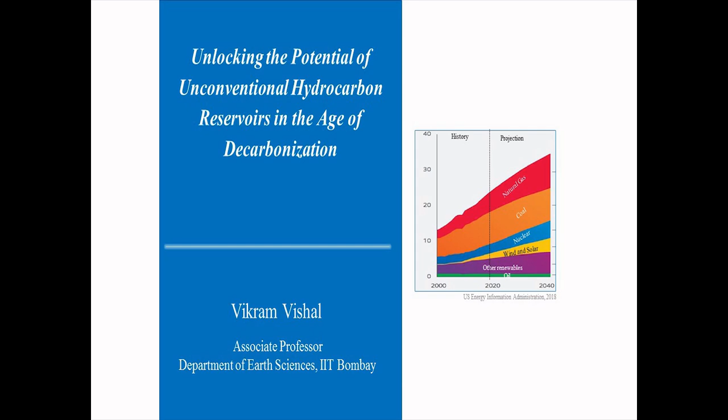So I take you from the enzymes that are presently active, as Professor Punekar introduced us to some of these enzymes that were active millions and billions of years ago, when these plants and animal life were supported, and they ended up becoming fossils and fossil fuels, what we are presently using for all our requirements of energy. So these fossil fuels include natural gas, coal, and oil. So the very first slide that I put here is to make a point that with the projection that we have right now and what we are currently using, the fossil fuels are here to stay, essentially oil, natural gas, and coal.

So do you know, when the sustainable development concept was introduced in the 80s, what was the percentage of fossil fuels in the energy mix? Any idea? It was 81% back then. So our target was to reduce fossil fuels in the energy mix and have a more sustainable development which is friendly with the environment. Do you know what is the percentage of fossil fuels in the energy mix right now in the world? It's still 81%. So we are still using the fossil fuels. There have been debates on how we'll transition from this to the renewables. That's the aim actually. We want to move on from the fossil fuels and target more on the renewables. But my point is that fossil fuels are here to stay essentially.

So what happens when we are burning these fossil fuels? Essentially coal, because India is predominantly, our energy is supported by coal, oil, and natural gas. So we are releasing large quantities of carbon dioxide. This anthropogenic carbon dioxide is being added into the atmosphere that we are living in right now. So from the historic ice records that we see from right now to 160 thousands of years before present.

So you see, whenever there has been a CO2 concentration rise in the atmosphere, it has been followed by a temperature rise. So there are many evidences which support that CO2, as you all know, is a greenhouse gas and supports the global warming that is affecting our planet as a whole.

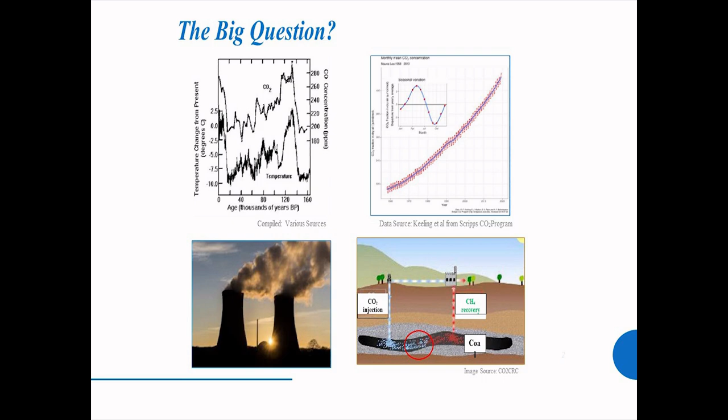So my research involves this condition where the reservoir is interacting with carbon dioxide. This fluid interaction with the substrate is what I work on, and I'd like to talk to you about that, but also mention something about the unconventionals. So this is a resource pyramid which lists the conventional and unconventional sources. Conventional reservoirs are the ones we have been tapping oil and gas from for almost 1.5 centuries or so, and they are pretty well understood around the world. So this is the top of the pyramid here.

But as we go down the pyramid, we have unconventional hydrocarbon sources such as shale gas, coal-bed methane, and gas hydrates. The incentive here is that the volume of oil and gas present in these unconventionals is very high. So that can actually support our energy requirements for the future, and our energy security is enhanced if we tap more of this. However, the challenges are many.

You see, this is the unit of permeability, 100 millidarcy. Permeability is nothing but the ability of the substrate to pass fluid through it. Once the fluid is passing conveniently, we can recover more and more oil and gas. But here the permeability is extremely low. So the target is to enhance the permeability of these reservoirs and get the oil and gas. But at the same time, we don't want to disturb the overall system, so system integrity becomes important.

So this is an example from US natural gas. We all know about the shale gas revolution of the US. After natural gas increased in the energy mix, as natural gas production increased, the overall CO2 emissions came down. So moving from coal to natural gas is actually helping us with less CO2 emissions. So that's an incentive, another way of looking at it.

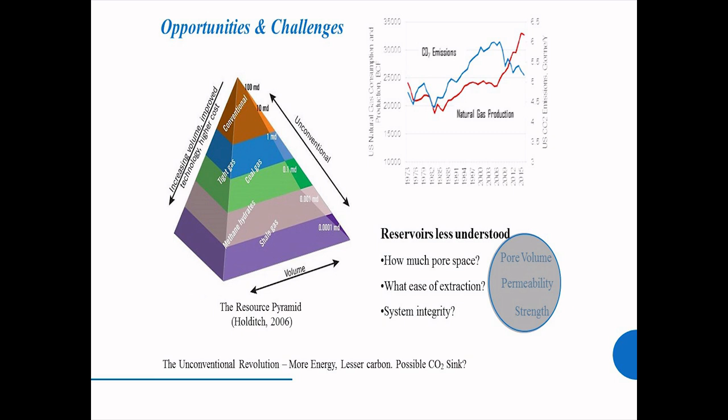So this unconventional revolution, as we call it, has more energy, this has less carbon, and then there is a proposition that once we have removed the natural gas from these systems, we can use the same pore spaces which have become voids to inject the carbon dioxide and store the carbon dioxide.

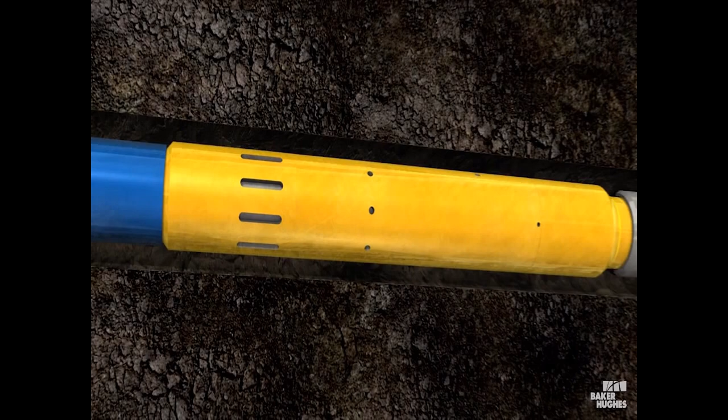Okay, so this is a small animation because we all know about hydraulic fracturing. This is by the courtesy of Baker Hughes. I just wanted to show how we actually hydraulic fracture. So the last 2 decades there has been development of this hydraulic fracturing and horizontal drilling. And see, this is the horizontal drill well. This is the target zone where we want to extract the gas from. But these formations are extremely tight, so the gas doesn't flow. So we need to create fractures so that these pores get connected.

So this high pressure proppant and fluid that is flowing through this tube, it's called a ball and sleeve mechanism. This blocks the other part, and this high pressure leads to fracture. And in these balls and sleeves, from one part to the other, we go from the heel end of the reservoir to the toe end, and in a series, we go on fracturing.

So now, in our group, we try to generate these conditions in the lab, creating that high pressure, that high temperature, and see what kind of rock behaves in what way. Every system, from basin to basin, and within the basin, from layer to layer, these beds are different, the conditions are different. So a better understanding will be needed to exploit these reservoirs.

So this is a glimpse of some of the facilities that we have in our lab. So we go to the field. This is, of course, an open cast mine, which is just for representation purpose. But we also get deep drill samples from hundreds of meters deep, in some cases kilometers deep. We get those samples from these oil and gas companies that are working, and then we create this subsurface condition in the lab. And you have hydraulic stresses from the sides, the stresses inside the sample because of the fluid that is present. Then the temperature is controlled, so pretty much replicating the subsurface.

And then we have a permeability and gas adsorption system, and another gas permeability compression machine that's for deformation. So the three questions that I posed, pore volume, permeability, and system integrity, we address all of these in our lab, and of course we do some numerical simulation as well.

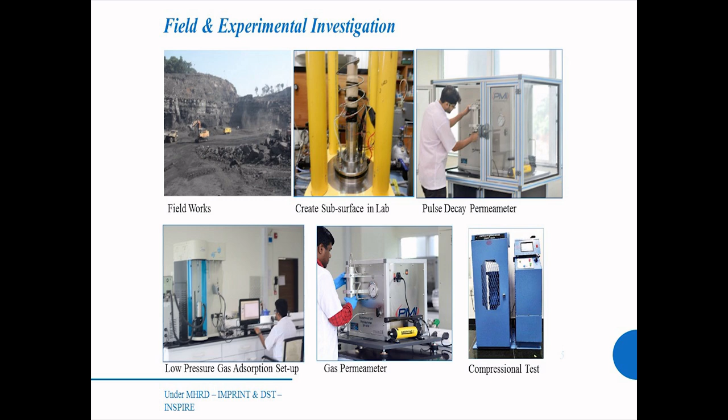So the talk is in three parts: coal, shale gas, and gas hydrates. The principles still revolve around the geomechanics of these reservoirs. They are all unconventional. So we take these coal samples, we put them into one of these systems that can replicate the conditions, and then we see how it is deforming, how it is allowing the fluid to flow from one end to the other. And these become inputs for the model that we generate for regional scale mapping of the gas productivity.

So we have these kinds of regional scale models. This is only for representation. You have a CO2 injection well, so we inject the carbon dioxide. This carbon dioxide essentially drives out additional methane. There are different reasons for that. First of all, coal has high adsorption affinity for CO2 over methane. So it takes up the carbon dioxide and pushes out extra methane. So we have enhanced methane recovery.

So by primary recovery, we can get around 25 to 30% of the methane. But by secondary recovery, using carbon dioxide, we can get up to 50% more methane. So this is solving both our problems. We are injecting CO2 inside. At the same time, we are producing more methane, which is needed for the energy security.

So, for a simple representative purpose, this is from one of the Raniganj basin in eastern India, and you can see that if there was no CO2 injection, this trend would have followed somewhere like this. However, because of the CO2 that is being injected in the central well, it's driving out extra methane, and that kind of changes the trend from here to in this direction. So we are getting a big quantity of methane produced.

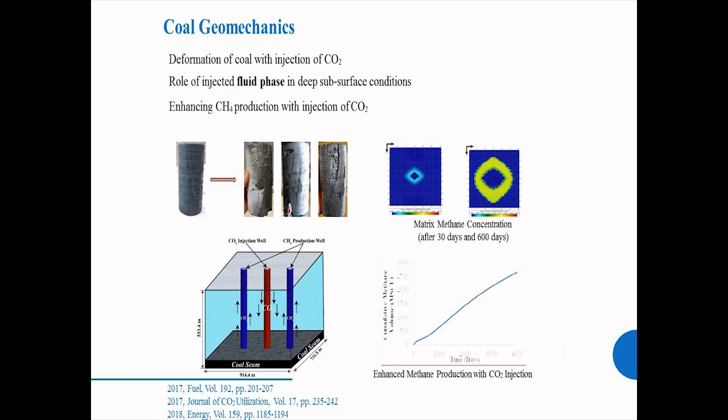So this has been proposed, and we are working closely with Essar that's operating the wells out there. So our studies are being meaningful for their lab works, for their field works as well.

Coming to the problem of shale gas, the gas that is stored is in extremely fine nanopores, having diameter of around 0.6 nanometers. Most of the studies before have focused on pore diameters above 4 nanometers. Some of the studies went to 1.6 nanometers. But we changed the experimental protocols and, primarily using the BET analysis, we found out the pores that were not primarily reported, in the range of 0.6 to 1.2 nanometers.

Now the point is, all those pores were not accounted in all these estimates that have been done previously. So once we assume that these pores are 100% saturated with methane or natural gas, automatically the denominator that I was talking about in the percentage recovery gets changed. So the estimates were done with older protocols. New protocols are being set up, and now we are getting a better understanding of these subsurface.

So this is Sondergeld figure. This is a well bore, and as you go from scale, this is a decreasing scale. So the fluid flow here is along the fractures, mostly Darcian, then slippage, diffusion, sorption, and Brownian. So we want to understand these systems better.

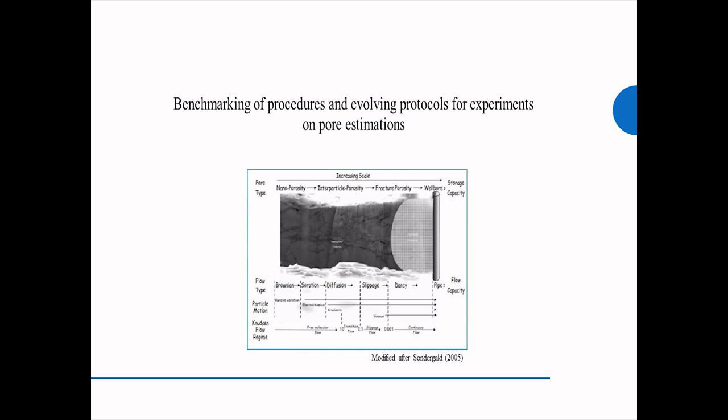So in that case, we are using FESEM that's available in IITB, LPGA. We are also using few other techniques. That's the low pressure gas adsorption. What you see here is one simple protocol, that's the outgassing procedure. Typically researchers would use 110 degrees to eliminate the water that was present.

But we change the temperature from 110 to 250 degrees Celsius, not altering the overall structure of the substrate that is present. Using the TGA, we could map that. And now we find out that there is additional amount. So the volume that is present here is much higher than what was done before, simply by changing the temperature of the outgassing of the system.

So using different protocols, we are trying to find out what is the gas estimate. Using FESEM and image analysis also, we're trying to find out those pores, map their volume, correlate with the other method, and give the exact numbers of the volumes of gas that we find.

As I showed you this tracking experiment, the animation, we generate that in the lab and replicate the same for the simulation, and that gives a better understanding of the reservoir while we are exploiting the reservoir. So essentially, our protocols talk about outgas temperatures, the DFT models, so QSDFT, NLDFT, density functional theory models, as well as the adsorbent model.

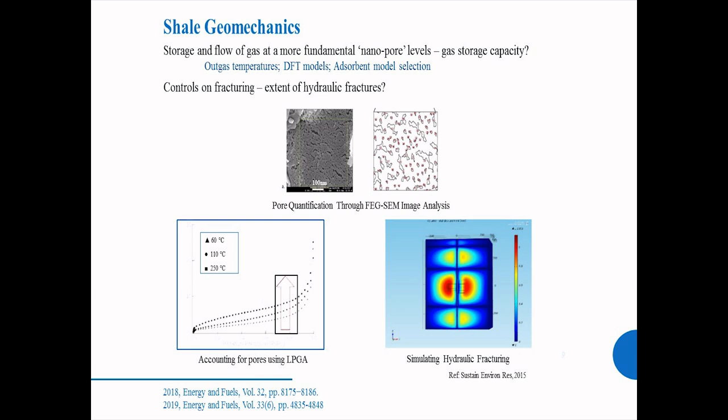Basically, shale has silica, shale has carbon. Theoretically, it's assumed that carbon is where we have most of this natural gas, but also clay can adsorb significant amount of natural gas, so that also has to be accounted for. So we are proposing that we have to stitch the pores that are seen in a carbon model and in a silica model, and adding them together, we can get a better estimate of the gases that are present. So collectively, we are doing these studies for understanding the shale system.

So on the pore size and pore volume estimation. At the same time, by simulating the hydraulic fracture: what are the pressures that are needed that can create a fracture, but not be long enough to propagate into another strata? Otherwise, if we create a fracture that can go up to a larger distance, the oil and gas that is present can leak and go into another formation.

That is something that is not desired. So that control is also developed by simulation studies.

Another aspect of our studies is to understand methane hydrate bearing sediments. So if you know, in 2014 or 2015, there was an announcement of a big discovery all along the offshore of India. We found huge gas deposits. These are essentially gas hydrate deposits. They look something like this. Unlike other phases where methane is present as gas or liquid, here it is present in solid form. Essentially, water is frozen, and it has a large amount of gas trapped in it.

So a conventional system can have one volume of gas per unit rock volume. An unconventional system like shale can have 7 to 10 times. A gas hydrate system, for a unit volume, can have nearly 150 to 170 volumes of methane. So if you tap the same volume of gas hydrate, much more methane comes out. It is said that exploiting even 10% of this gas hydrate in our offshore, we can fuel the country for 200 years. So that's the incentive.

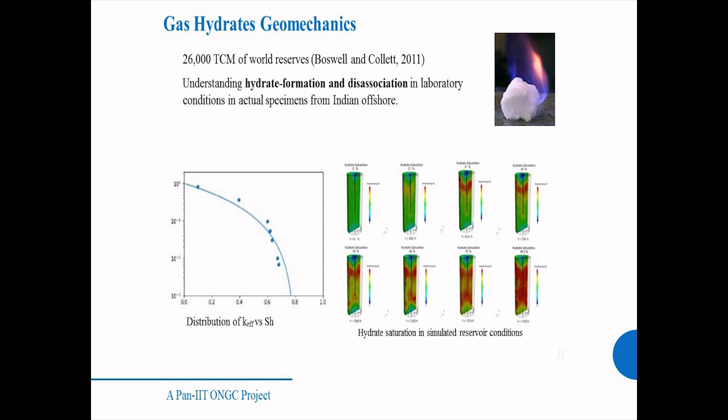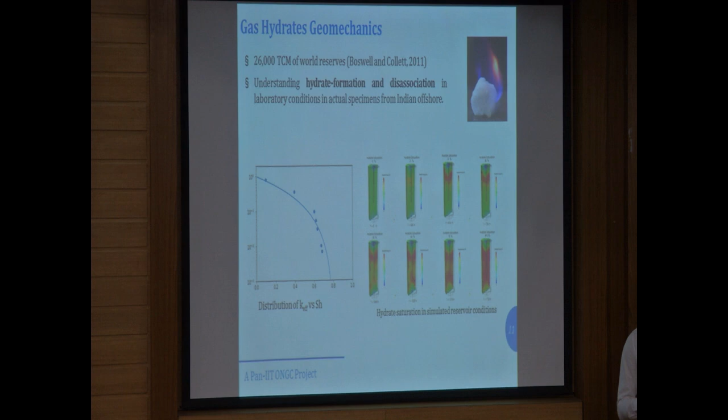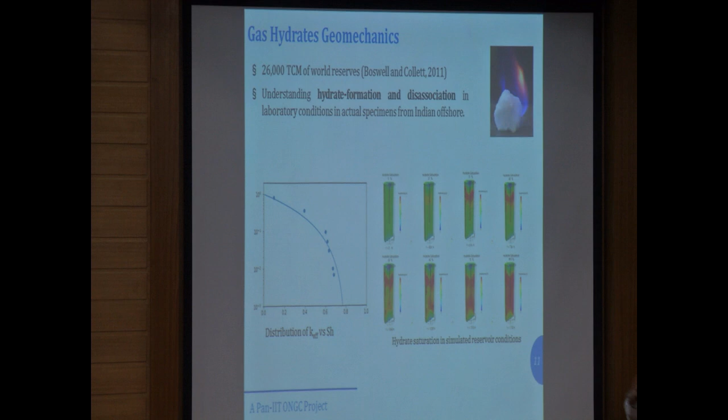So we replicated the conditions in the lab, and we are trying to optimize the depressurization and heat dissociation so that we can still maintain the stability of the system and extract methane gas. In this work, we had permeability data from the experiment and validated it through a model. This is the model we can use for regional scale mapping of gas production.

All right. So the point here is you can find oil in a new place using an old idea. But if you're looking at the old place and still want more oil, you don't really get it with an old idea. You need new ideas. So that's how we are looking into this subject of poromechanics and trying to resolve this for unconventional systems.

So we have gone beyond, and we are in collaboration with BARC, using their small angle neutron scattering system. It's a non-destructive tool, and through this method we can measure the connected as well as the non-connected pores, which will help us understand these systems better.

And this is from the CT scan facility we have here. We are scanning the entire block, finding the distribution of pores and solids, splitting it into matrix blocks and pore blocks, and within the pores, which are connected. The green ones are connected and the red ones are non-connected pores. So when we talk about reservoir exploitation at kilometer scale, we have to look at nanometer scale to understand the system better. That's the focus in our lab; some findings have been published, and students are working on this right now.

So coming towards the end, what are the future opportunities of the unconventional? We are talking about the CO2 problem. At the same time, we are talking about more requirement for methane and natural gas and use of fossil fuels. So what I see as a proposition: India has not really done any of this work on CO2 storage in the underground on site; this is confined to the lab. But what I see as one of the major areas of research right now is injecting the CO2 into the subsurface and going towards a pilot or demonstration.

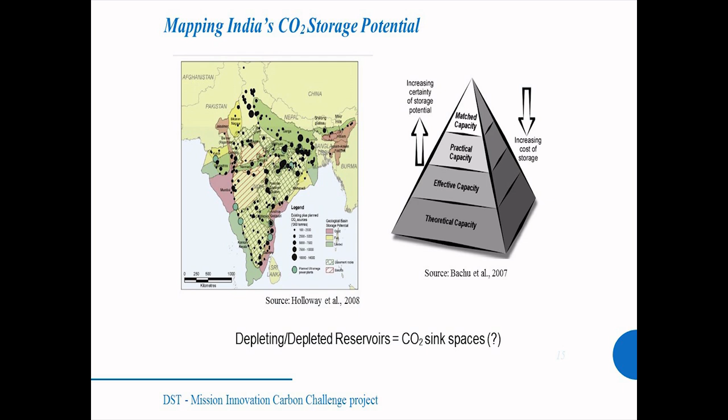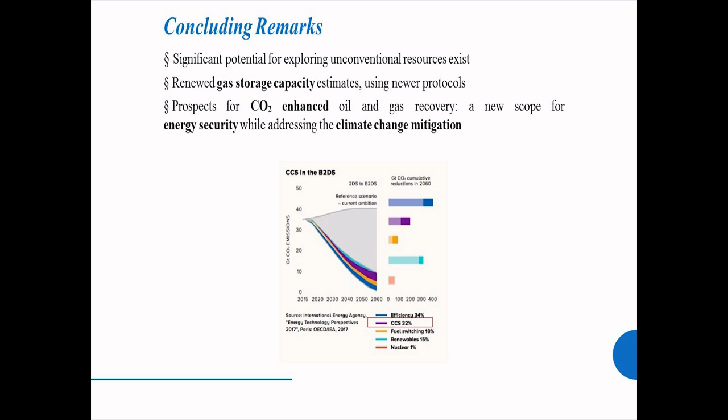So these are my concluding remarks. Basically, significant potential exists. That's what our group focuses on, with reservoir mechanics for unconventional. With renewed gas capacity estimates, we are using our protocol to propose these renewed gas capacity estimates for India, because the USGS has a number which is so different from what the Indian Geological Survey would have. So that's why our protocol becomes important.

CO2 enhanced oil and gas recovery solves two problems together. One, it provides us with energy security with extra methane, and it addresses the problem of climate change mitigation by injecting the CO2 inside. This is from the IEA, which shows that of all the efforts needed for controlling the temperature rise of the globe to less than 1.5 degrees Celsius, 32% of that effort has to be CCS, that's carbon capture and storage. So that's the seriousness of CCS around the world, and it is needed in India as well.

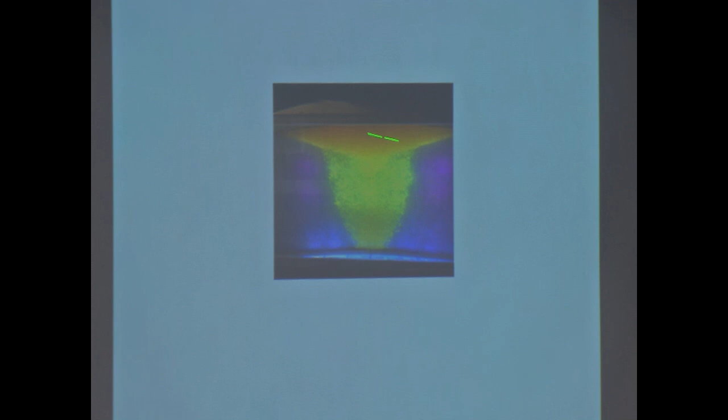So again, towards the close, this looks like a numerical simulation to most of you. It looks like it's very easy to make a numerical simulation, but it actually is not. You can see here something is being injected, it's rising, and the concentration is growing. Essentially, this is how oil and gas remains trapped or confined. When there's a cap rock on the top, it has extremely low permeability, so the oil and gas gets trapped here.

But this is essentially a carbon storage model that we developed in a lab, inspired by Professor Mazzotti in Switzerland. Here we are trying to demonstrate how we can inject CO2 at the base of the target formation, and it rises by its buoyancy. It gets trapped at the cap rock, which has low permeability, and it is expected to remain there forever, typically forever on the geological time scale.

This was needed because in most of my interactions with policymakers and non-specialists, it was a big challenge to understand where these spaces are, where the CO2 would be stored. Safety is a major concern, and it should be a concern. But a better understanding of the systems allows us to plan for the safe and secure disposal of CO2. So that's what we built in our lab to explain carbon capture and carbon storage, and you can visit our lab and see how this works. This should be an animation showing CO2 being injected and coming up there.

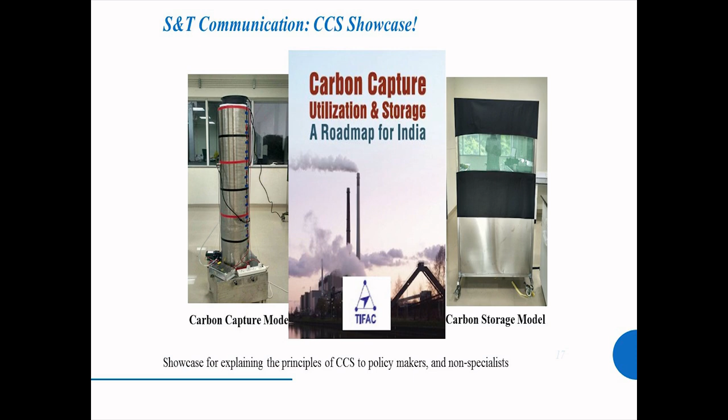This actually led to interaction with the government, and we came up with the carbon capture utilization and storage roadmap for India that was released by DST in 2018. It gives us a roadmap that large-scale mitigation of CO2 can only happen once we are injecting this CO2 into these reservoirs. There are options, suggestions and recommendations for forming green chemicals and other bio-based capture. However, large-scale mitigation can be supported by injecting this into depleted oil and gas formations.